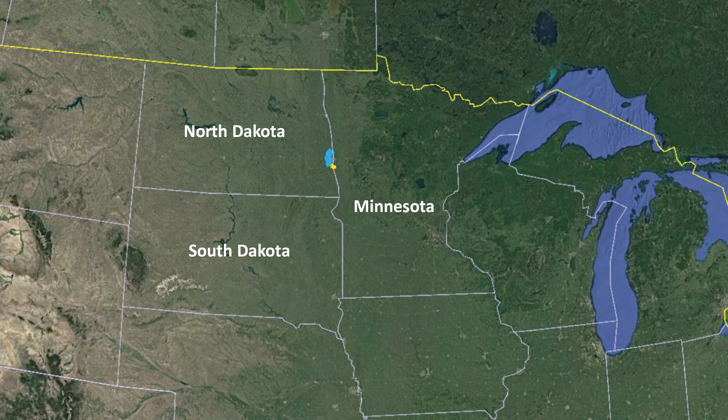for many years. The largest population area along the river, which begins at the confluence of the two rivers in southern North Dakota, is at Fargo, North Dakota, and its neighbor, Moorhead, Minnesota. Historically, the North Dakota side of the river has experienced more extreme flooding due to slight geographic differences between Minnesota and North Dakota. I'll talk about the need for flood mitigation.

The Red River has reached flood stage about 60 times in the last 122 years. In particular, you can see from the top 10 floods that our 100-year effective base flood elevation is 39.3 feet, and we've exceeded that in 3 particular years, with the most extreme event happening in 2009 at 40.82 feet. Just a few numbers. There's about 260,000 people, along with their homes and businesses, that are currently at risk of catastrophic flooding, and obviously significant economic impacts.

In 1997, which was the record at the time, flooding caused $3.5 billion in damages within the Red River Valley, including the almost complete destruction of a sister city to the north, Grand Forks, North Dakota. Millions more have been spent fighting floods since then. However, once the diversion is completed and certified, not only will these costs be prevented, but residents and businesses will be able to drop their mandatory flood insurance requirements.

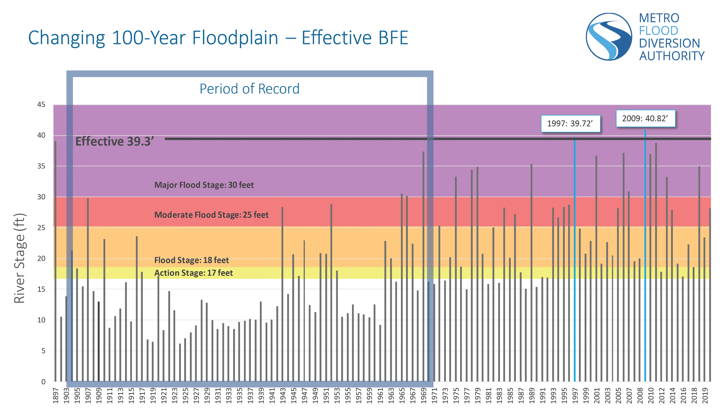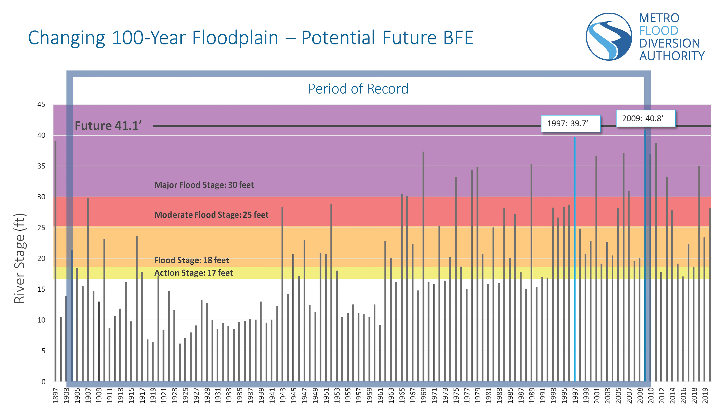And the current effective floodplain maps do not really encompass the later years in which we've experienced the most intense flooding. After the project is complete, the future BFE will be remapped through a LOMR process, and we will take into account a period of record from 1903 up until the record flood of 2009, which was at 40.8 feet.

Talking about the record flood of 2009, here's a closer look at what it took to fight that flood. We had a crest of about 40.82 feet. That took 69 miles of emergency clay levees, 7.3 million sandbags were used for sandbag levees, 8 miles of HESCO barriers. The effort took approximately 150,000 volunteer hours, and it cost about $8.4 million to implement the temporary flood fighting measures.

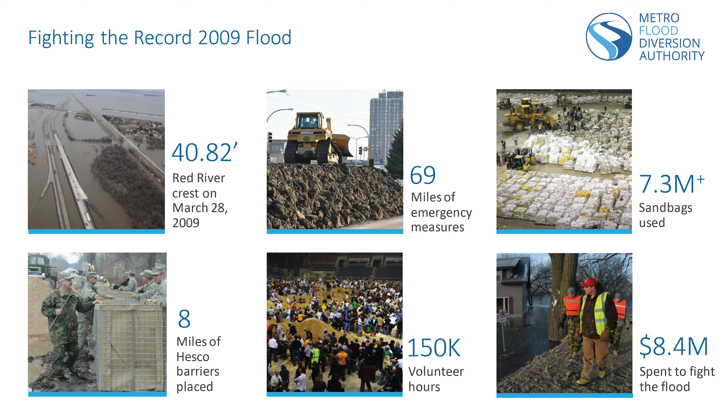Next, I'll have Greg Thompson talk a little bit more in depth about the project overview. Well, thanks, Joel. The primary goal of the project is to provide FEMA-accredited 100-year flood protection for the Fargo-Moorhead metro area. Here you'll see the future 100-year floodplain on the left and the with-project floodplain on the right. The project will provide flood protection from 6 rivers.

These include the Red River of the North, which flows in a northerly direction, and a tributary to the Red River. This is the Wild Rice River that enters from the south. Then the Sheyenne River, which brings a good portion of the eastern third of North Dakota to this location, flows into the project area from the southwest and then along the west side of the metro and discharges into the Red River north of the project area.

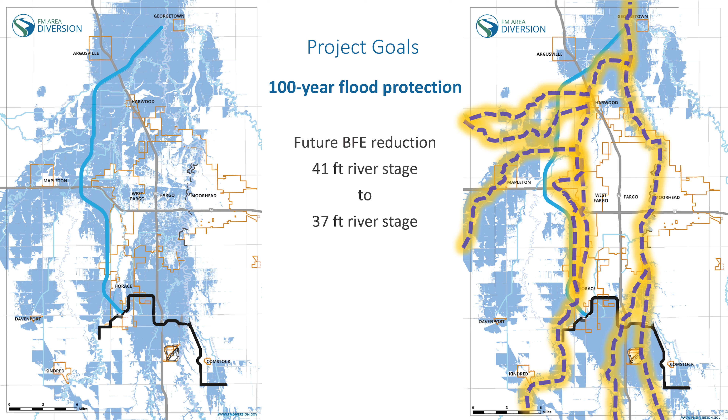The Maple River discharges into the Sheyenne River, and then two smaller rivers, the Lower Rush and Rush River, also discharge into the Sheyenne River as well. The project will reduce a 100-year flood level from a river stage of 41 feet down to a river stage of 37 feet, which is a 20-year flood event.

The second goal of the project is to provide a fighting chance at 500-year flood protection. This is while implementing additional temporary flood protection measures. On the left would be the existing conditions 500-year floodplain, and that flood level would be higher than any of the levees that we currently have through town.

And the project is designed to produce a river stage of 40 feet for that 500-year flood event, which would be manageable with the levees.

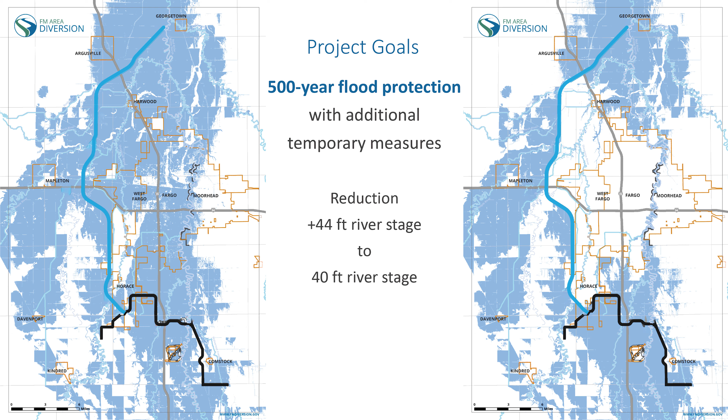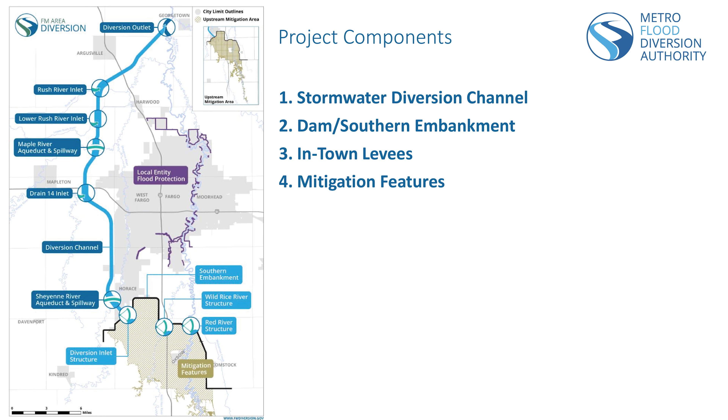The project has four main components. The stormwater diversion channel is shown in the blue line on the west side of the metro area. The dam and southern embankment is shown with the black line on the bottom of the page. And then the in-town levees are shown in purple. And then the fourth component is the mitigation features, which are implemented to offset some of the impacts from the flooding behind the dam. I'll step through each of these in the next few slides.

The diversion channel is 30 miles in length, and it begins in the southwest corner of the metro area, connected to the southern embankment and the pool area. It extends around the west side of the metro and discharges back into the Red River north of town.

The stormwater diversion channel is being designed, constructed, and operated and maintained for 30 years through what's called a public-private partnership, or a P3. And the entity doing this is the Red River Valley Alliance. Feel free to look them up online for additional information. One thing that's interesting to note is that this is the first public-private partnership for flood protection in all of North America. Now looking into some of the other technical details of the project.

So the channel dimensions will vary depending on which rivers are being brought in and where. At the south end of the project, the channel will be 20 feet deep and approximately 120 feet wide. And then on the north end, it'll be 30 feet deep with a bottom width of approximately 250 feet. The channel will have 6-to-1 side slopes based on geotechnical stability requirements.

And it'll have spoil banks on either side with a partially embedded levee on the east side, shown in red, which helps with the certification to keep the city protected from the flooding that's in the channel itself. The overall right-of-way corridor of this diversion channel will be 1,500 feet.

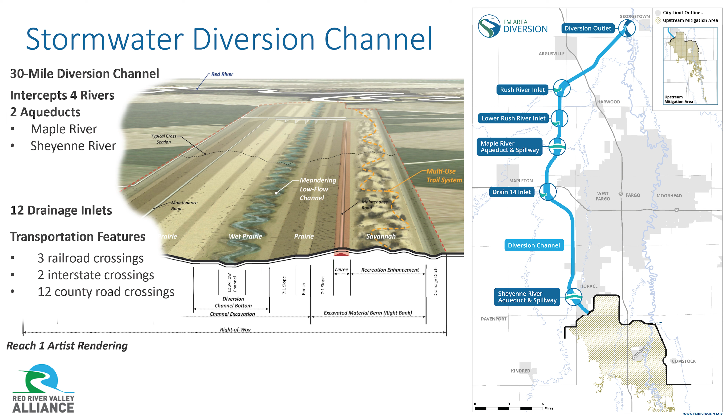The diversion channel will intercept 4 rivers from the west. The Rush and Lower Rush will drop directly into the diversion channel. And then the Sheyenne and Maple will have aqueduct structures, which I'll highlight a little bit later. There are 12 additional drainage inlets besides the rivers. And then from a transportation standpoint, the diversion channel will cross 3 railroads, 2 interstates, and 12 additional county roads, all of which will pass over the diversion channel with bridge structures.

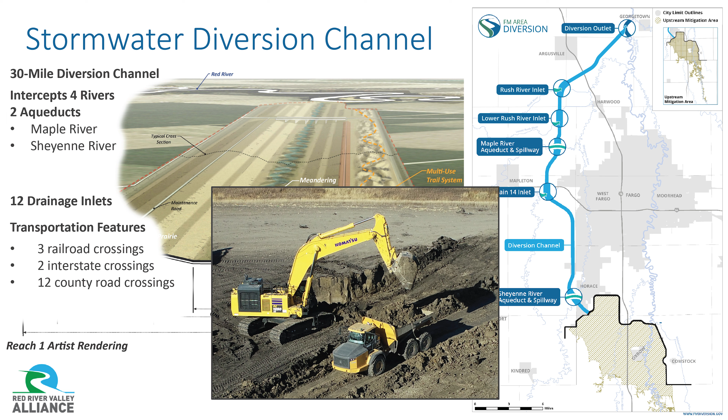Construction began last fall when the contractor purchased over $50 million worth of equipment from local businesses. They have multiple 100-ton excavators as shown here and 40 cubic yard off-road dump trucks to help with the channel excavation and material movement. They've been averaging approximately 35,000 cubic yards per day, and they typically run two 11-hour shifts nearly every day throughout the year. At the end of the project, they'll have moved 45 million cubic yards of material throughout this 30-mile channel reach.

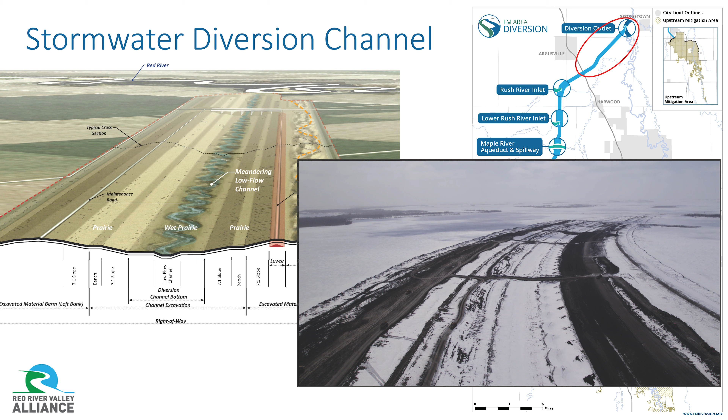And they've actually found that excavating in near 0 to 10 degree Fahrenheit temperatures seems to work best for moving the clays. There were a few days this past winter when the temperatures got up in the 20s and 30s, and they found that it got to be a little slippery for efficient earthwork. So it'll be interesting to see how things go this summer.

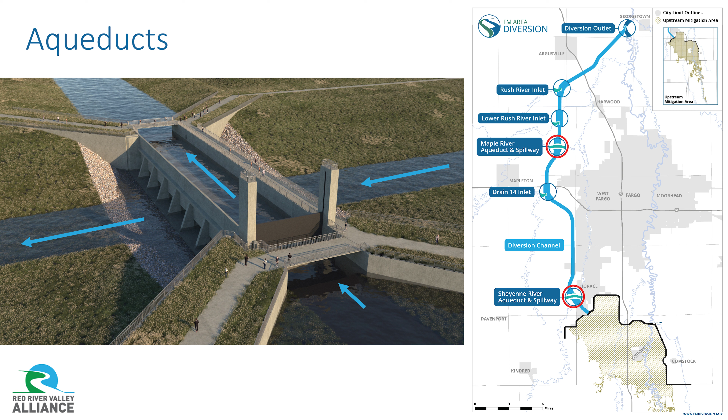As I mentioned, there are 2 aqueduct structures, one on the Maple River and one on the Sheyenne River. These aqueduct structures allow low flows to pass through an aqueduct flume and into the protected area in a controlled manner. And then during times of flooding, additional water will pass over a spillway and into the diversion channel.

The second main component is the dam and southern embankment. This is a 20-mile long dam that stores floodwaters within what we're referring to as an upstream mitigation area. This is used to offset project impacts, which Jay will talk about in a few minutes. The average dam height on the north end is 18 feet, and this tapers down to match existing roadways on both the west side and the east side of the embankment.

There are 3 gated structures that will be built into the southern embankment. The diversion inlet structure regulates floodwaters into the diversion channel, and the Wild Rice and Red River structures allow controlled releases into the protected area. I'll touch on these structures with a few more details in the next few slides.

The project will store approximately 150,000 acre-feet of water for a 100-year event, with an average maximum depth of approximately 10 feet. There's also an interstate grade raise extending down through the center of the upstream mitigation area, and additional county and township road raises up and over the embankment.

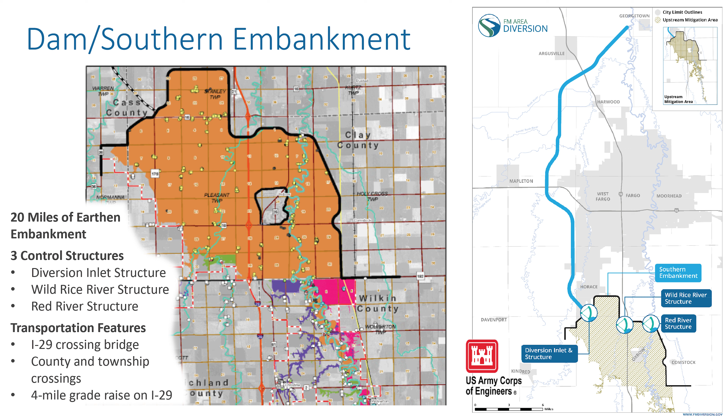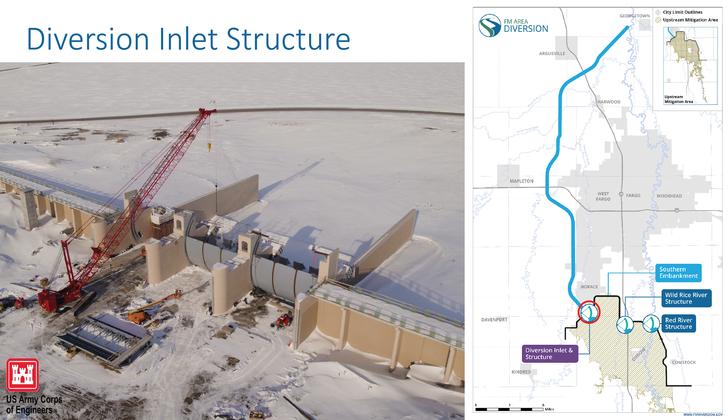Here's one of the latest pictures of the diversion inlet structure. It has 3 Tainter gates that are each 50 foot wide and 26 feet tall. This structure will be completed this summer with a cost of approximately $46 million. The Wild Rice structure has 2 40-foot by 40-foot Tainter gates, and this structure will be completed next year with a cost of just under $60 million.

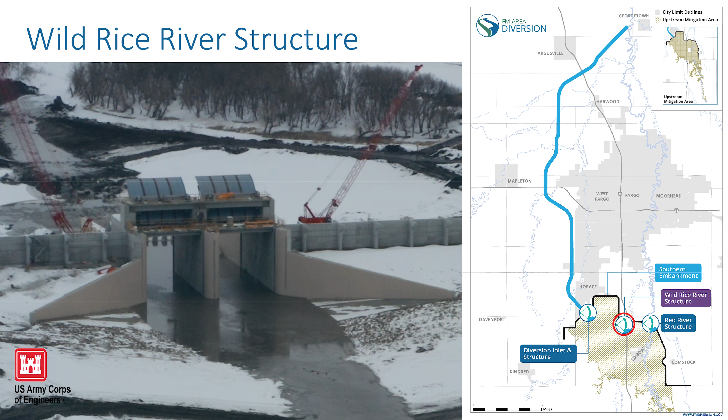The third structure, the largest of the 3, will have 3 50-foot wide by 50-foot tall Tainter gates on the Red River. Construction for this structure began this past fall, and it will be completed in 2026 with the rest of the overall project. This is the largest and has the highest cost at $115 million.

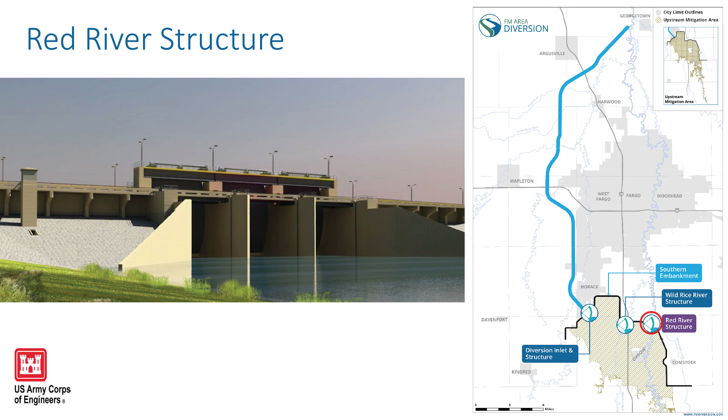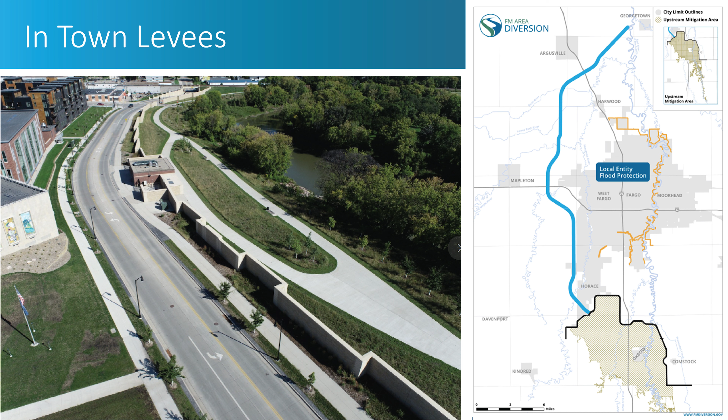The third main project component is the in-town levees. They're also referred to as the local entity flood protection. These are basically levees and flood walls shown in the top right in the map there throughout the Fargo and Moorhead metro area. Levees and flood walls, as well as stormwater pump stations and other infrastructure that's necessary to handle the flows that are going to be passed through the main rivers. This picture shows a flood wall and stormwater pump station in downtown Fargo.

The fourth major component is mitigation features. This includes rural residential as well as commercial structure removal from that upstream mitigation area behind the dam, and then relocation of these structures, a lot of times along the fringes of the floodplain in higher ground. The project will also include flowage easements.

Here in the blow-up picture there, it shows a zone 1 and zone 2 in the orange and the purple, and that's a federal mitigation zone where impacts are greater than 1 foot. And then a very small piece of green is a North Dakota mitigation zone where the impacts are between a 1/2 foot and 1 foot. And then the pink in Minnesota is where impacts are greater than a 1/10 of a foot.

The mitigation features also include several community levees. Right in the center of that orange there is a ring levee around the city of Oxbow, the community of Hickson, and then the rural subdivision Bakke. Off the map to the south, approximately 4 miles, is another levee for the city of Christine, where the impacts are just over a foot with the project.

And then the city of Wolverton is about 7 miles off the page to the south and upstream, where the impacts from the project are approximately a 1/2 foot. The city of Georgetown is at the downstream end of the project that will receive additional flood mitigation measures. Then there's a number of environmental mitigation features as well.

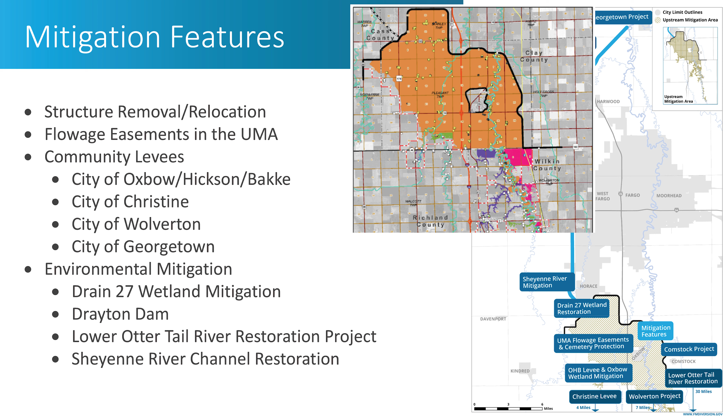With that, I'll turn it over to Jay to speak on some of the project operations. Thank you, Greg. As Joe and Greg introduced, the overall goal of the project is to provide permanent flood protection for the Fargo-Moorhead area. The operation is to reduce flooding through the metro area, and another very important piece is to minimize Red River downstream and upstream mitigation area impacts.

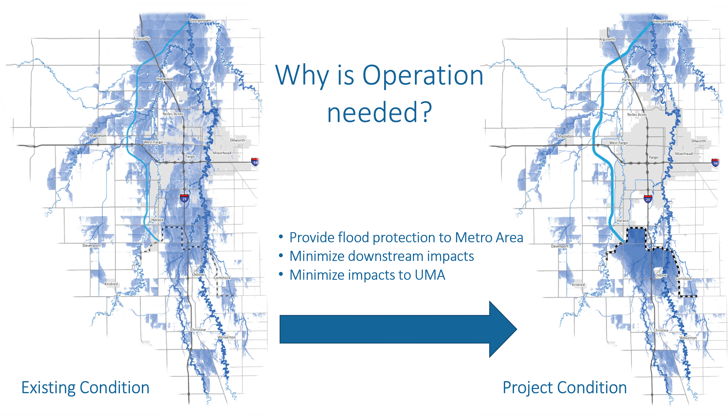In the next few slides, I will show you how the operation generates impacts without operation rules, and how operation rules mitigate those impacts. The project provides flood protection to the metro area, and by doing that, it reduces a large portion of existing floodplain storage.

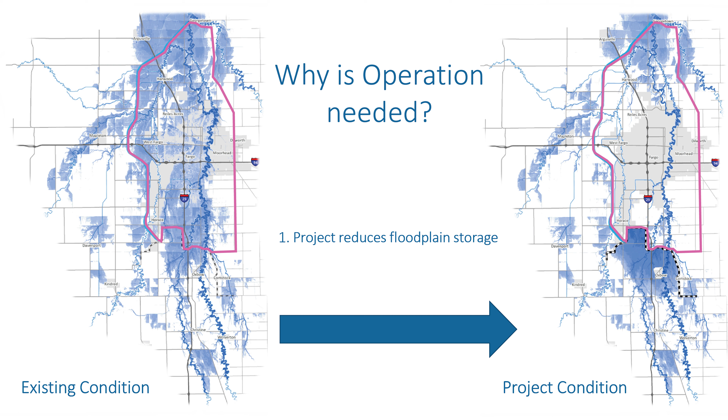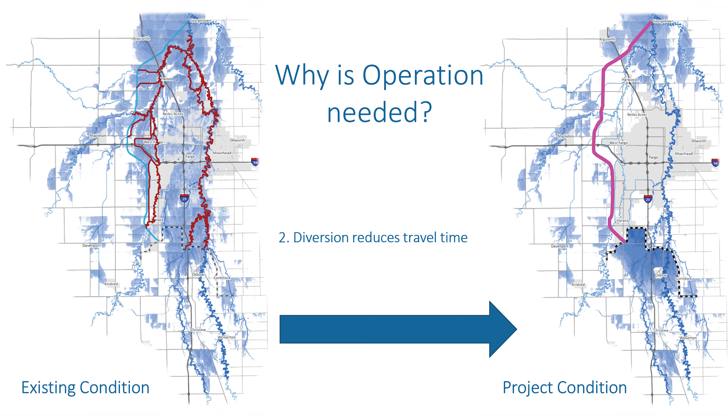In addition, the diversion channel is more efficient than the natural river, so water flows around the town faster than it does through town today. The Red River is roughly 60 miles, and the diversion channel is roughly 30 miles. Under existing conditions, there are 7 rivers that drain to the downstream end of the metro area, downstream of the future project, to generate this green hydrograph.

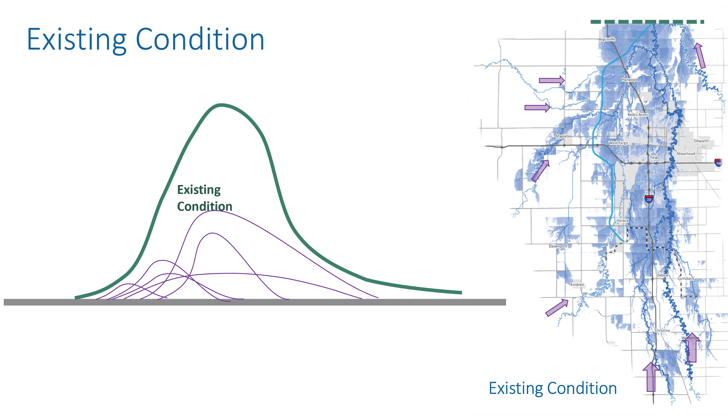What would happen with the diversion channel but without storage? The flow through town is restricted, and additional flood water would flow through the diversion channel, which generates this purple hydrograph.

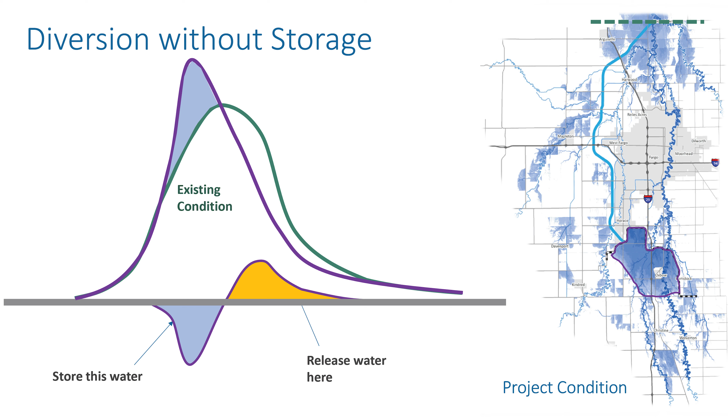The flow arrives downstream much earlier and produces a higher peak, which generates downstream impacts. And next question is, how to mitigate these impacts? The solution is to store this flood water in upstream mitigation area, and then release it later when flood peaks pass through and produce similar flood peak at downstream similar to the existing conditions.

The only operational components of the project are tainter gates within the southern embankment. As Greg mentioned, there are 3 sets of gated structures: at inlet of diversion channel, on the Wild Rice River, and on the Red River, from left to the right. By operating these gates, flow through metro area will be reduced, flow through diversion channel will be regulated, and flood water will be stored in upstream mitigation area.

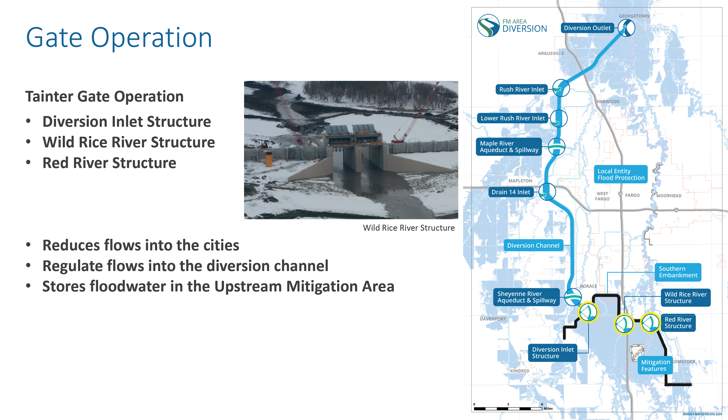In the next few slides, I will give you a tour of flood operation through the progression of flood hydrograph. The example hydrographs and flooding here are from a 100-year event. During non-flood times, Red River structure and Wild Rice River structure will be open. Diversion inlet structure will remain closed. As snowmelt runs off, stream gauges will be monitored, and flows will be recorded at 2 upstream gauges.

Here you will see the blue hydrograph is combined Abercrombie and Enloe, the 2 upstream inflows to the project from Wild Rice River and from Red River. The red hydrograph is going through southern embankment and then through the town. The yellow hydrograph you will see in the next few slides is flow going through the diversion channel, and the green dashed hydrograph shows the stage hydrograph of upstream mitigation area.

The project only operates when the flow coming into the project exceeds 21,000 cubic feet per second, which is equivalent to a 20-year event. So there's 5% chance of project operation in any given year. If the flow is less than 21,000 cubic feet per second, the project will not operate. When the flow exceeds 21,000, project will begin operation.

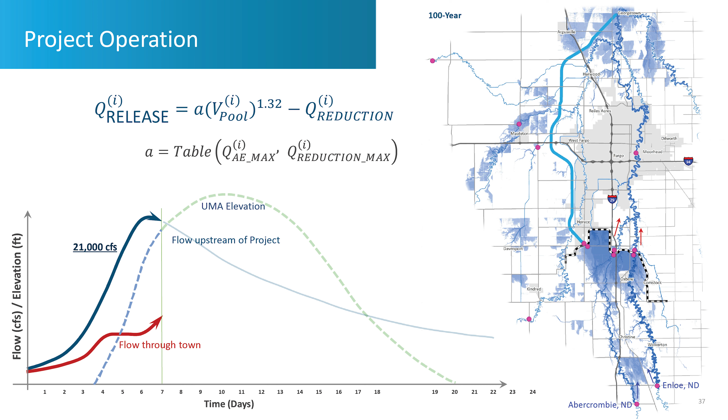This design discharge through Wild Rice River structure and Red River structure is calculated using a discharge volume relationship, which is a function of flood volume within the upstream mitigation area, as well as real-time upstream inflows. This is a nonlinear exponential relationship that is well calibrated using many synthetic and historic events to calculate the optimal discharge releases from the pool area to minimize the downstream impacts.

You will see this red line will increase based on the designed calculated discharge, then it will level off to produce a 37 feet stage through the town for the 100-year event. Any excess flow will be passed to the diversion channel through the diversion inlet structure. Following the flood crest in upstream mitigation area, the dam will continue to release flows through the diversion channel and through town as the flood recedes. And you will see this yellow line, diversion flow starts to extend up.

The maximum flow for the diversion inlet structure will be 20,000 cubic feet per second for the 100-year event. As water level in upstream mitigation area drops down, the gates will return to their original positions and prepare for next flood. The operation interval varies from 1 hour to 6 hours depending on different stage of the operation, and also depends on the magnitude of the flooding events.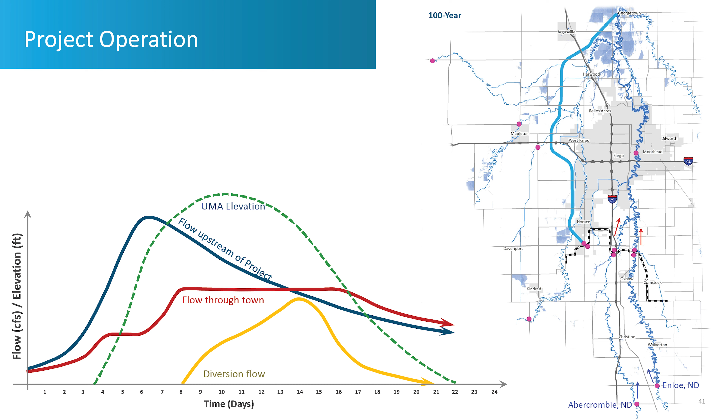Operation rule is robust to handle flood events larger than a 100-year event. For the 500-year event, flows through town will be increased to 40 feet. And then flow through diversion channel will be increased to 25,000 cubic feet per second. If the flood event approaches the IDF, inflow design flood, roughly 80,000 cubic feet per second inflow, the diversion gates will be wide open, and flow through town will be held at 40 feet.